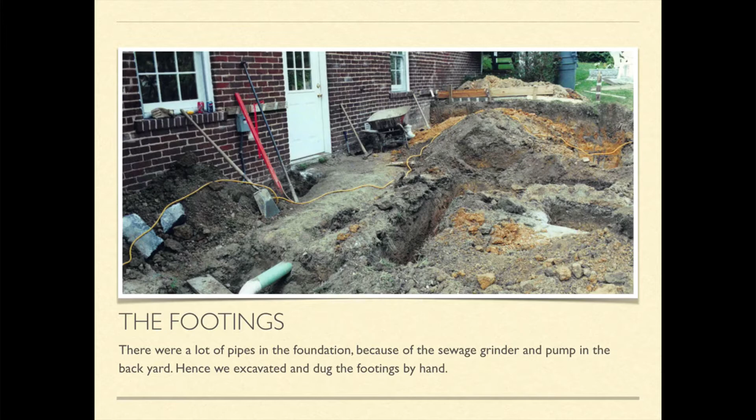Because there's a grinder pump in this neighborhood and in this yard, we had to dig everything by hand, and we encountered a lot of pipes. It's always a lot more difficult than you think on paper. A number of pipes, and even with digging by hand, we hit a few of those.

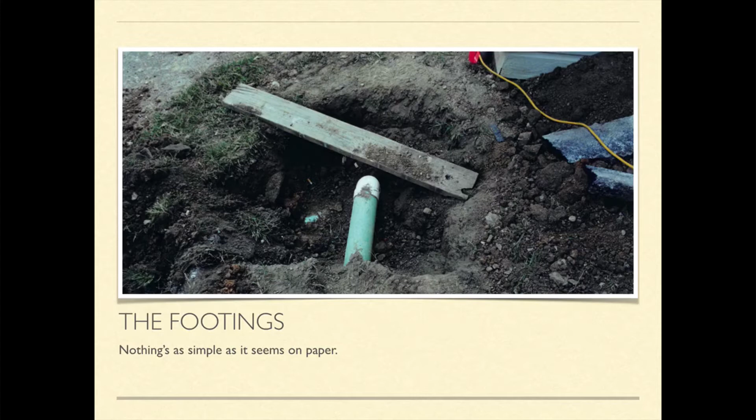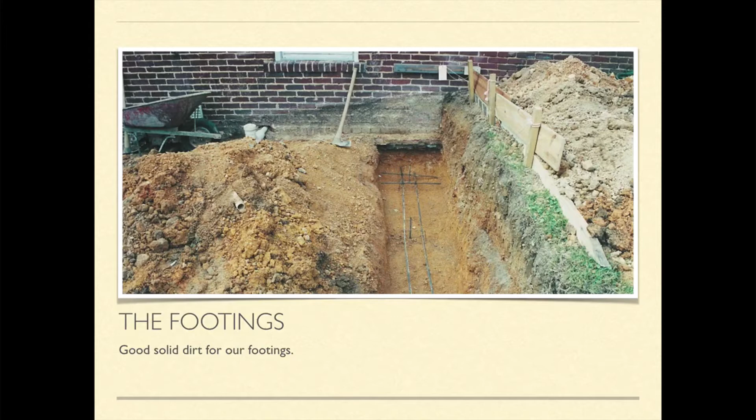So finally we've got it excavated and the footings dug. We're in what's called chert here in the south, which is a kind of rock and dirt. We get our rebar in, number 4 rebar on high chairs, and we're ready to pour now.

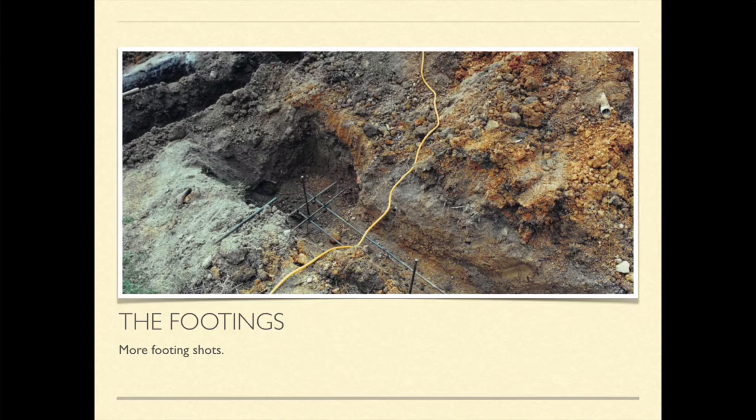So we finally get those poured and put some straw around to keep down the mud. What we usually do when we frame a small addition or a deck is build it on temporary posts. We do this so we can get the floor all leveled and square, and then when we've got it just right, we'll measure for the permanent steel posts. It really speeds up the process, especially on decks.

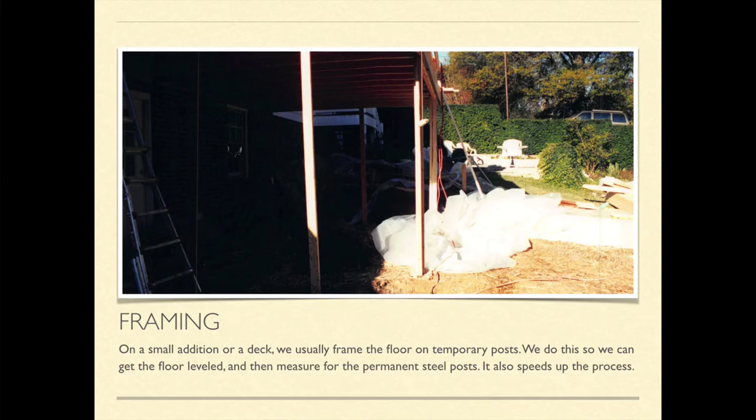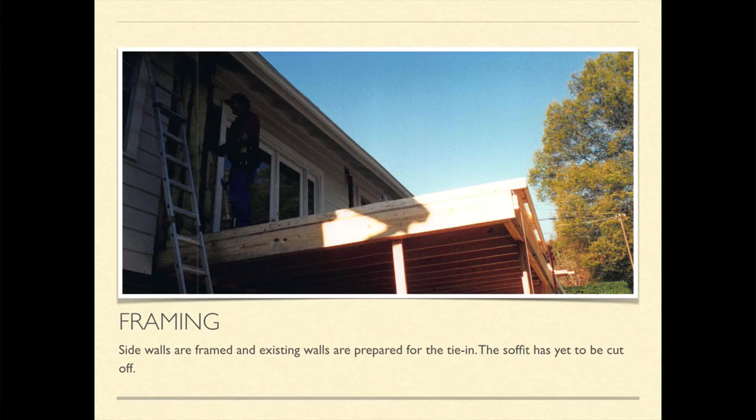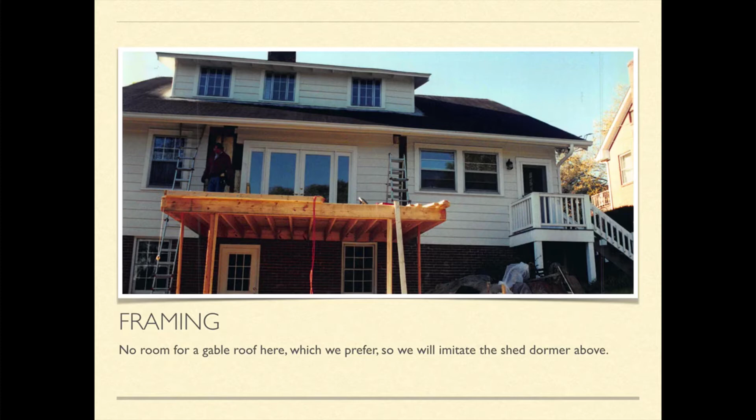Now the side walls are all framed in, and we have yet to cut the soffit off so we can raise these walls. Because we have a dormer above, we can't put a gable roof in, which is what we always prefer, so we're going to imitate the shed dormer above.

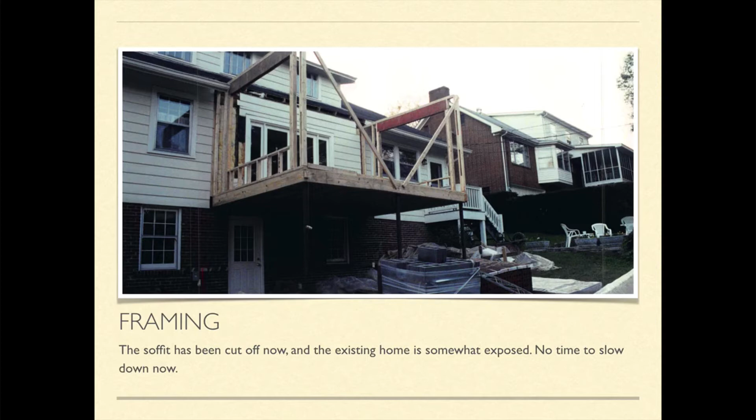Now we've cut off the soffit and put our two side walls up. Once we cut into the house like this, we like to really speed it up so we don't get any water inside. Here, one of our carpenters is tying in the existing soffit to the new addition.

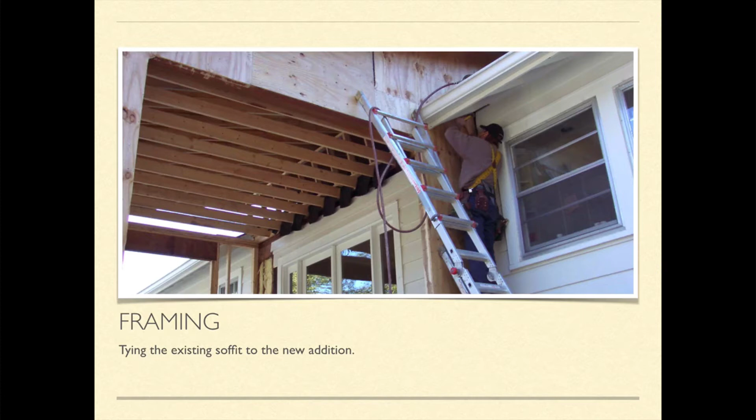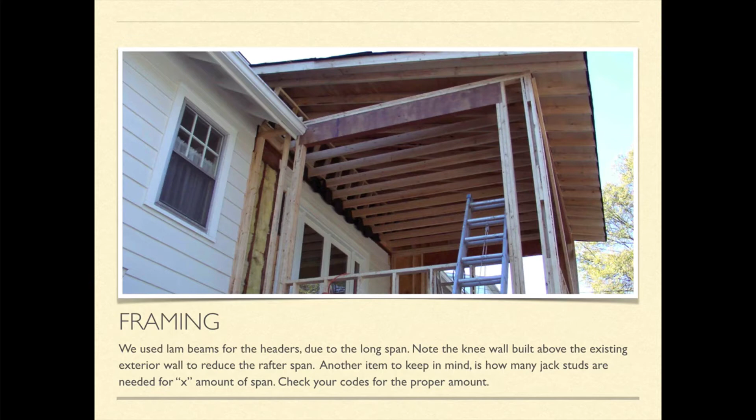We use lam beams because we had some really long spans in this one. Notice that we use two jacks under these lam beams, two jack studs, and you should check your codes because they vary from place to place, so be sure you have the right amount of jack studs when you're doing long spans like this.

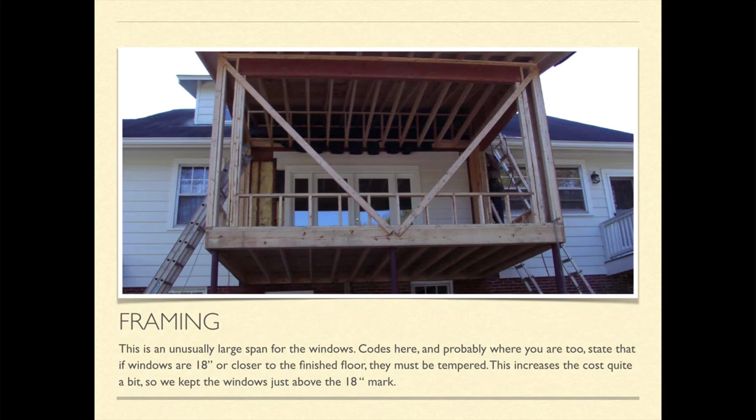There's a big window we have that's going to be looking out the back. Notice also how close to the ground it is. Most codes, if you are less than 18 inches above the finished floor to the glass, require that the glass be tempered, and that costs quite a bit more. So we designed this so we could get just above the 18-inch mark.

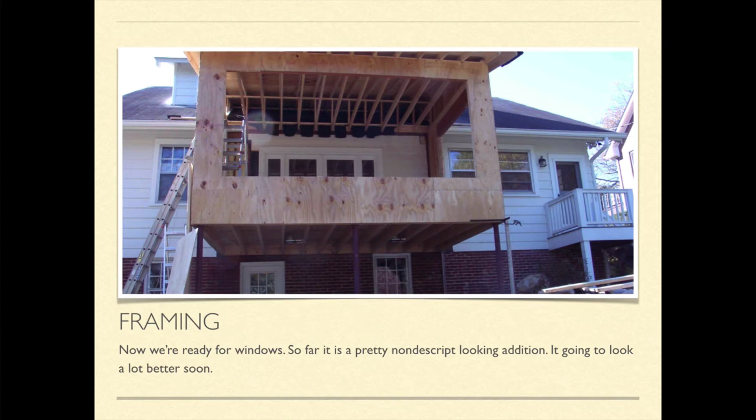Now we're putting the sheeting on, half-inch sheeting to brace it, and we're ready for windows now. Pretty plain looking, but it's going to look really good when we finish.

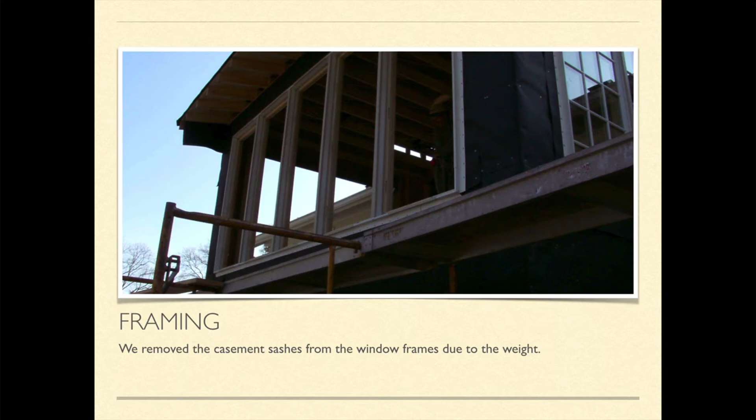Because of the size of these windows, we had them all mulled together, and we just take the casements out and put the frame in, being sure that everything's straight, plumb, and level. We're using a Lincoln window here.

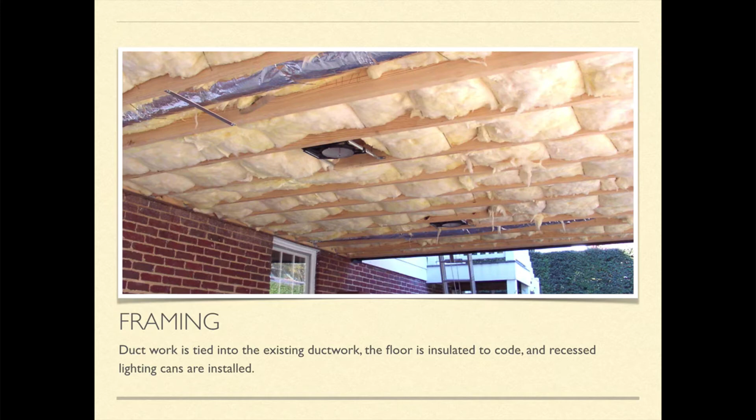Now we've got our floor frame. Our ductwork is brought in from the existing ductwork, and recessed lights are wired in.

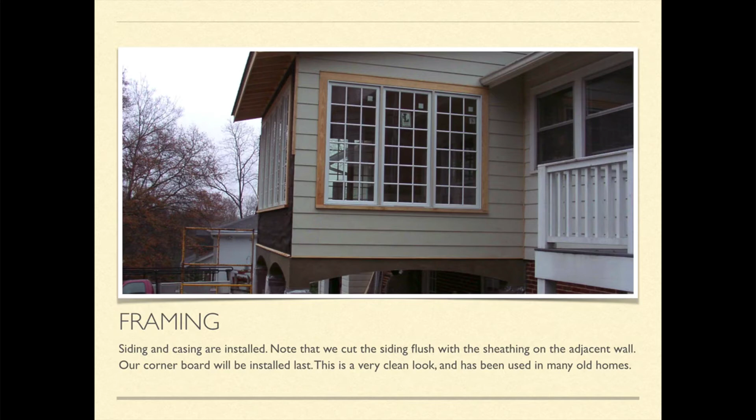Now we're putting on the casing and the drip cap above the casing and siding. Notice our siding is cut exactly flush with the adjacent sheathing, and I'll show you why in just a moment.

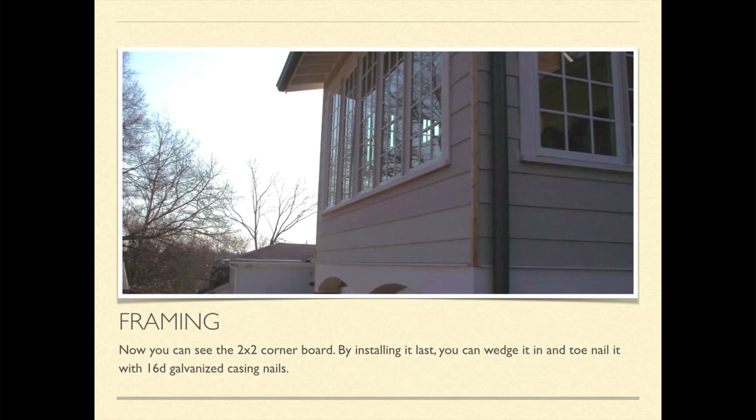Now we're all dried in with felt, and now you can see the 2x2 corner. We've seen this in a lot of older homes where they put the 2x2 in. So what you do is cut your siding flush with the sheathing on both sides, cut your corner piece, put it in place, and then wedge it in tightly using 16 penny galvanized casing nails.

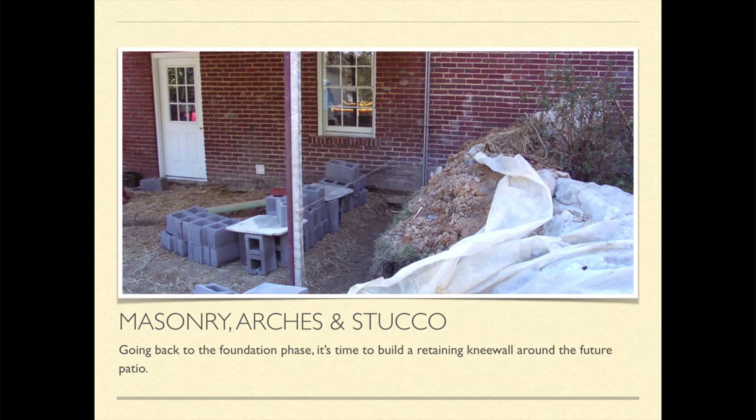Now let's look at the masonry underneath the addition. We're going to build a knee wall because we need one to retain this dirt here, and that's almost done now. We got the brick to match as closely as we could to the old brick.

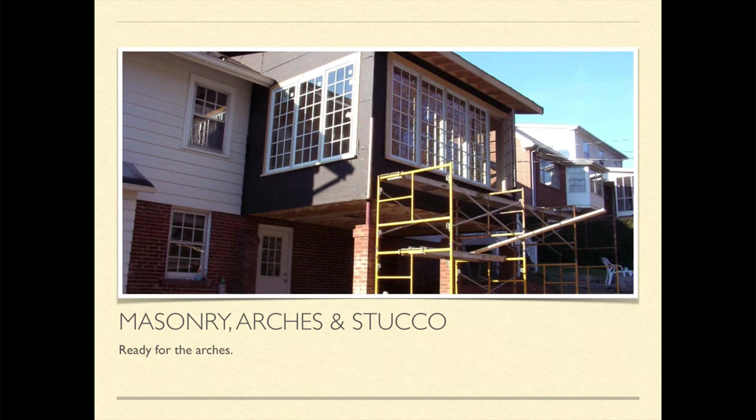And now we're ready to put some arches in. Also we've framed for the slab underneath.

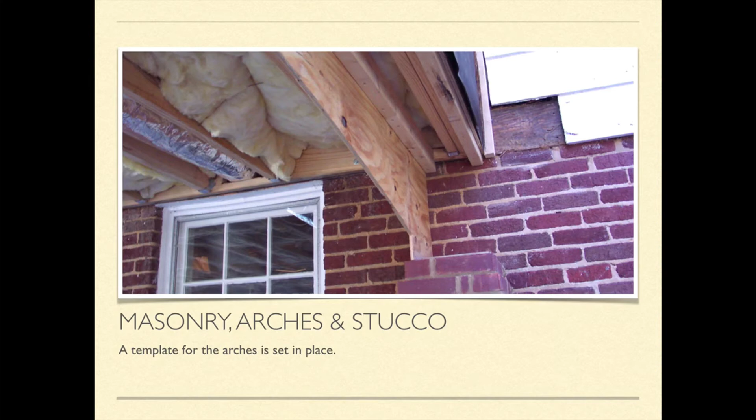Here is the template for the arch. You can see the nailers above where we're nailing these templates into place, plywood templates. And here's another view of it. We've protected the knee wall below with plastic and tarps.

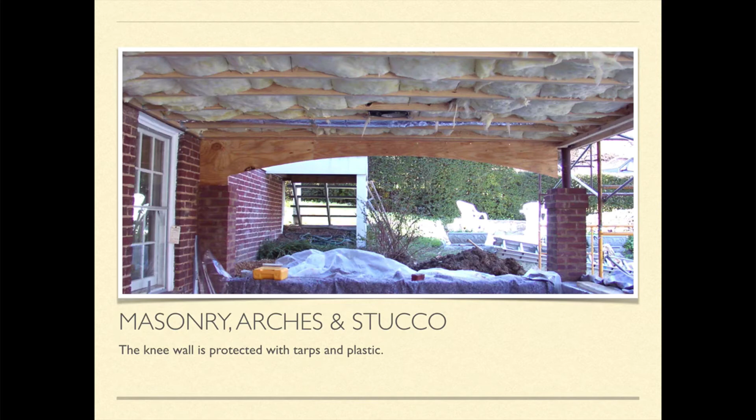And here you can see the framing for the arches is all complete now.

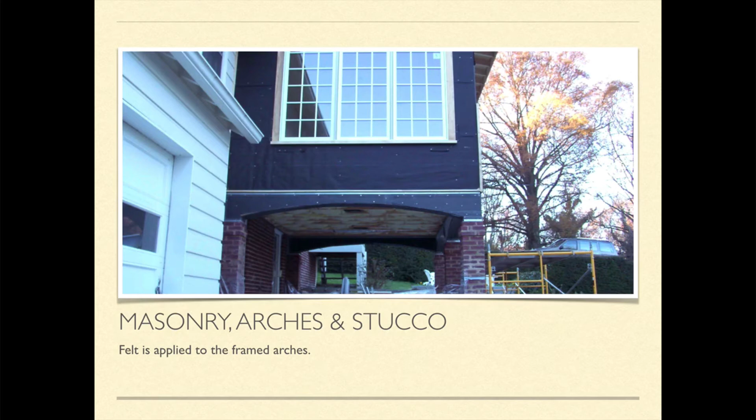Felt is applied to the framed arches, and then the wire mesh is put in place. We're going to use real stucco in this case.

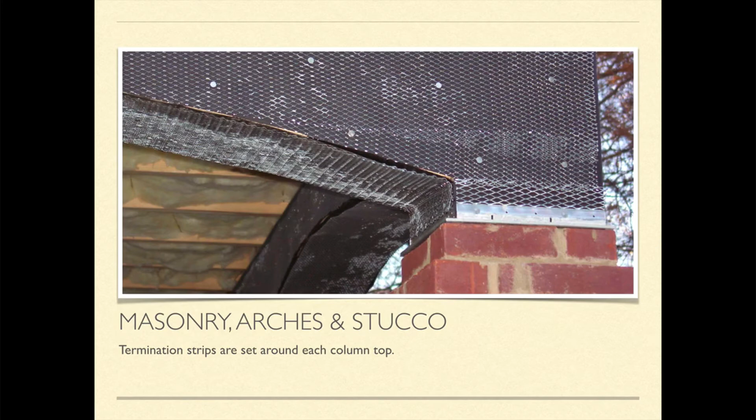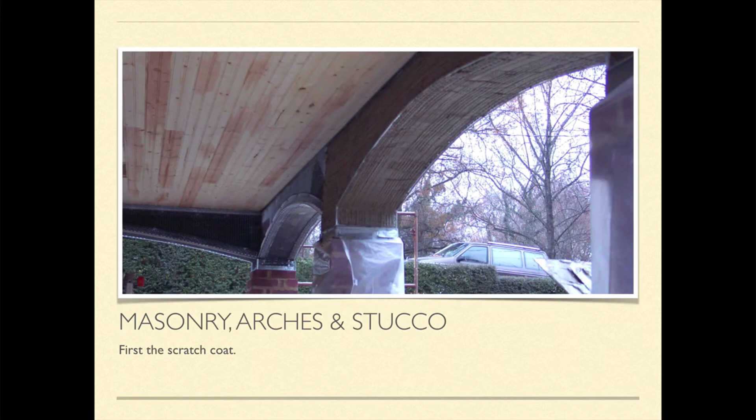There are some termination strips that are put along the top of the columns, and there's another view. You can also see the arched metal we've put around the arches. And the scratch coat is being applied.

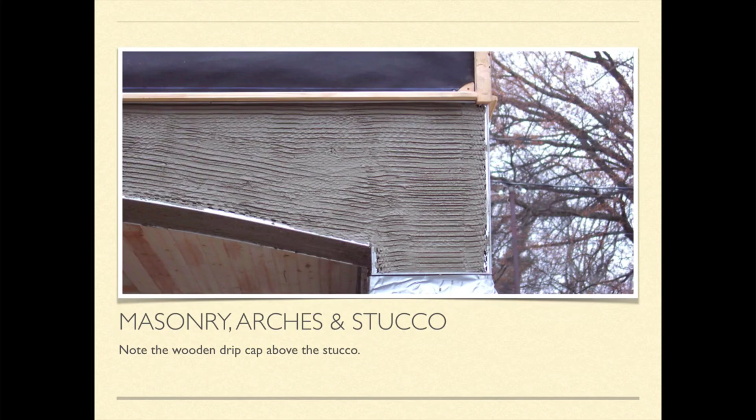Also note that we're using regular drip caps to bring the siding down on those drip caps. Now he's putting his second coat on, and then we'll put the final coat on top of that.

The floor is a stained concrete which we scored into large tiles.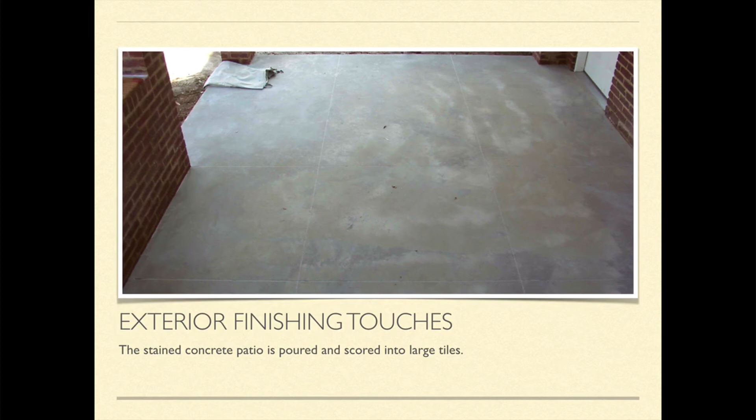And now the painting is going on, and the addition's ready for paint now. There's a rear view, and a view from the left side.

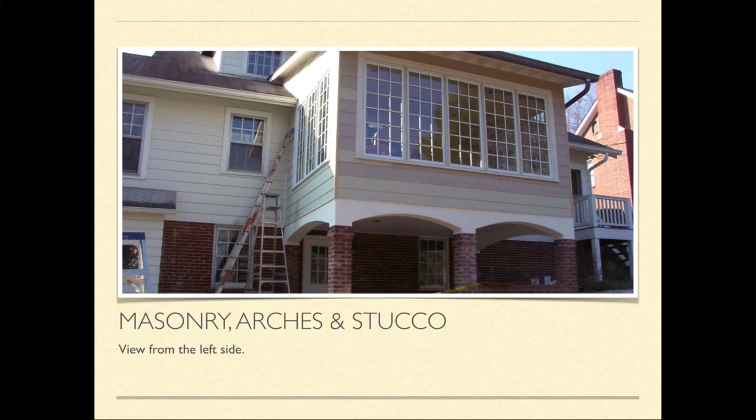Now we're moving inside. We used a beadboard ceiling with recessed lights. You can see we used casing with a back band around it, which is similar to the casing in the original home.

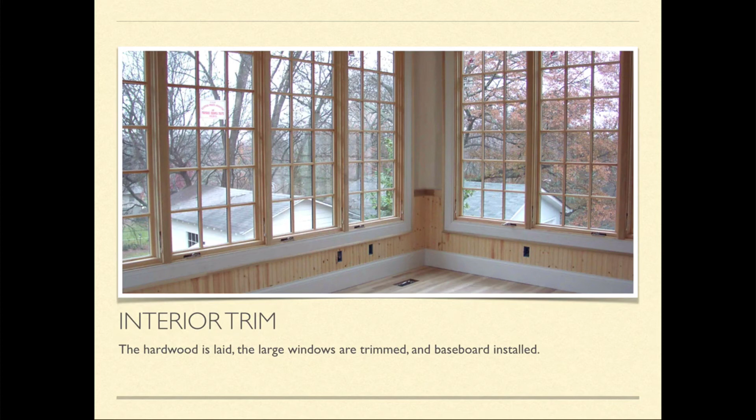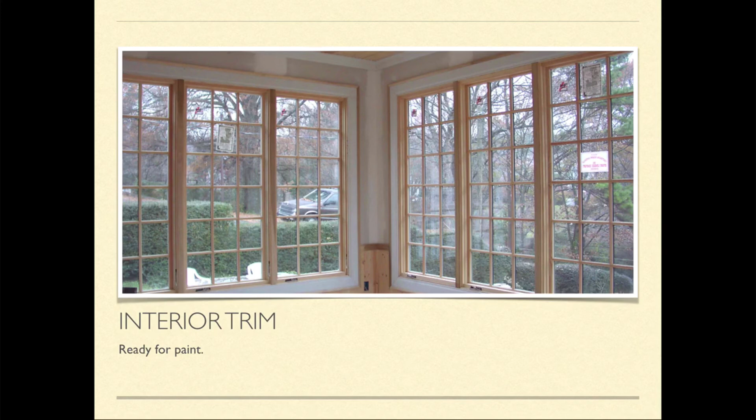And we used beadboard wainscot and topped that with chair rail. Got some really large windows to look out.

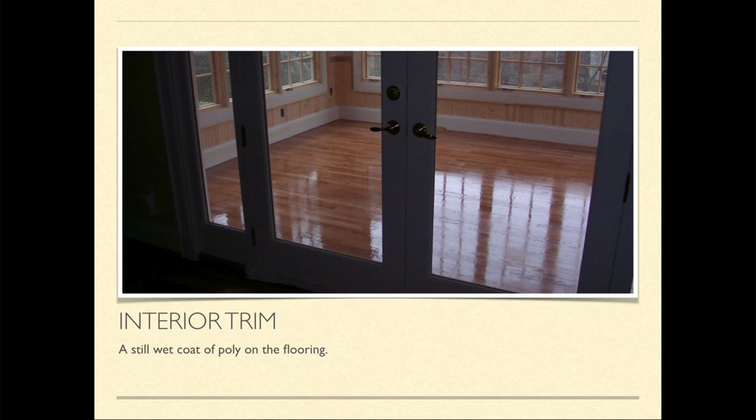And now the coat of poly has been put on. And this is the after view, so you're looking out from the windows toward the backyard.

And it really turned out nice. It's a very cozy place to sit with lots of light, and it can be closed off entirely with those exterior doors.

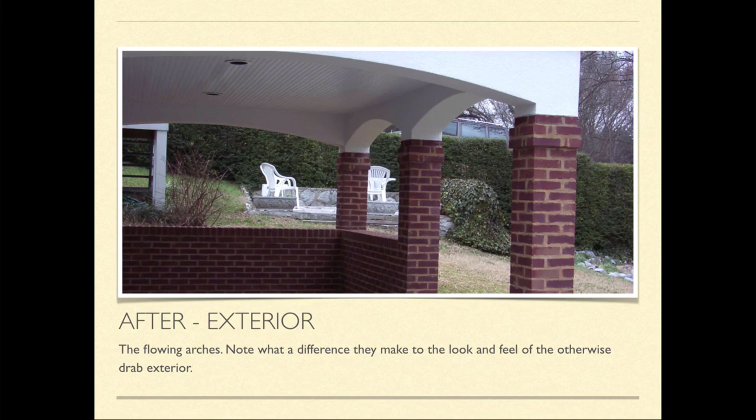And here's the outside afterwards. The arches came out very nice, and it gave it such a wonderful feel on the patio, and also looking at it from outside the patio. It's just very nicely designed. You can see how clean it is and how the arches tie into the column tops perfectly.

So there we have it. That's a beautiful sunroom addition. Maybe that will give you some ideas for your next addition, how to tie it in and make it fit into the old home as best you can.

The patio turned out to be a really nice, cool place. It's on the northern side of the home, so it's very nice in the afternoon. So it turned out really pretty. We enjoyed doing this, and are very proud of how it turned out.